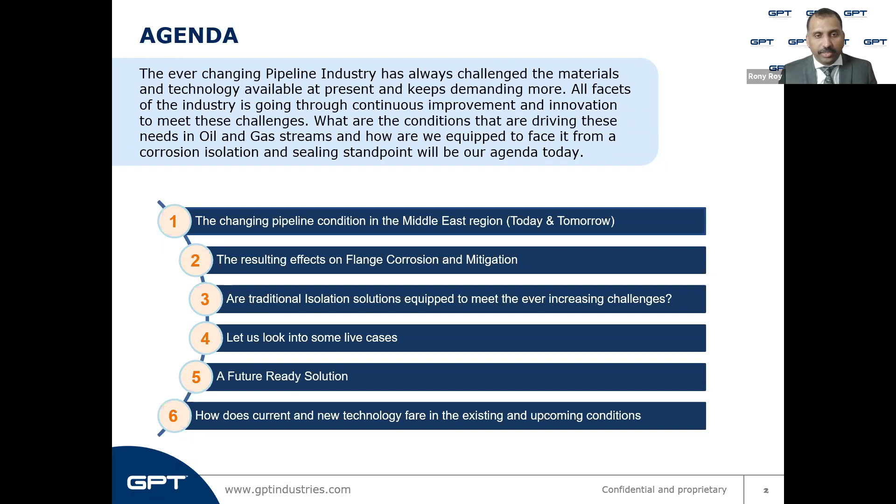Today we are standing at the threshold of a significant energy revolution that is going to change the way we live, travel, conduct business, and manufacture. Yet we know that man's dependence on hydrocarbons is not going away anytime soon. In fact, peak oil is still a couple of decades away, and gas continues to dominate the market as it backs up renewables and provides cleaner energy.

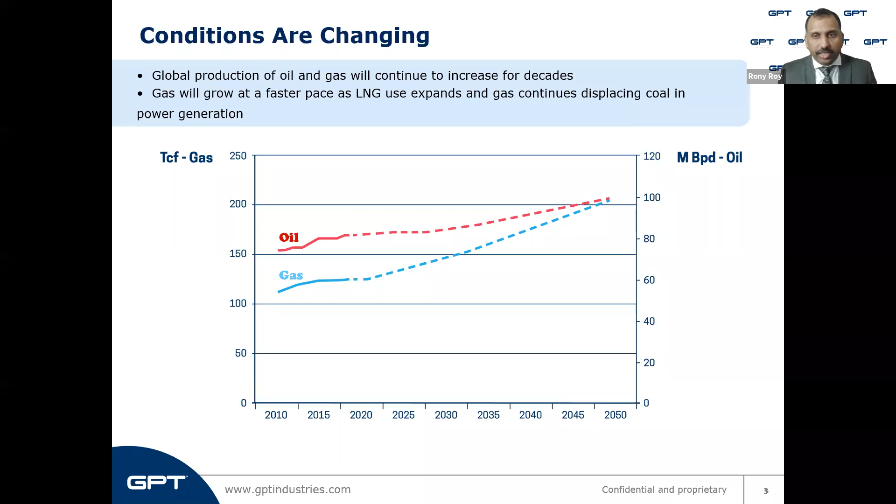Population growth is also driving that demand, and producers are going to have to operate differently to meet it. The easy to extract fields are getting depleted. As an attempt to make the supplies meet the demands, newer techniques and technologies are required.

Now the conditions are changing because the scenario is becoming more and more demanding for the oil and gas or hydrocarbon industry to rejuvenate old wells and to go deeper than ever before to obtain the oil and gas.

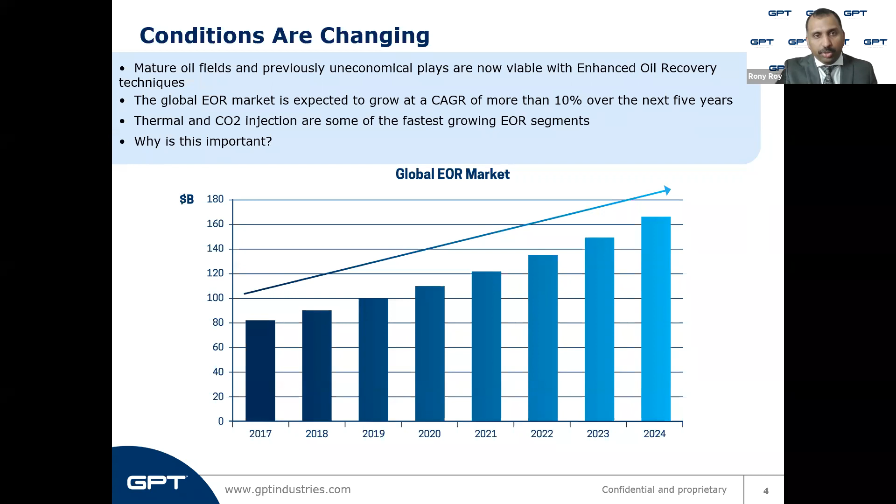Enhanced oil recovery methods have to be put in place now using steam, nitrogen, natural gas, carbon dioxide, thermal injection, and these are all on the rise and will continue for the next couple of decades. This exposes products in the pipeline to temperatures and pressures and mediums that it has never seen before, and that too in large quantities. High pressure and high temperature wells, and ultra high pressure and high temperature requirements, are on the rise. Suitable materials that can withstand very high temperatures and very high pressures are required to be employed for each and every component in a pipeline.

Further, the conditions are changing in terms of the sour content in the wells. As mentioned earlier, the easily recoverable and sweeter resource wells are getting depleted quickly. The newer enhanced recovery methods and knowledge in exotic metallurgy has helped to drill deeper and extract from wells with more sour content. H2S from these sour wells, hydrogen sulfide, affects detrimentally all the components used in these operations. In pipelines, hydrogen sulfide is a primary contributor to a substance called iron sulfide, which you see as black sedimentary buildup inside the pipelines when you open it up after certain years for maintenance. And this buildup is intrusive in nature, and it disturbs the flow of media and even facilitates corrosion.

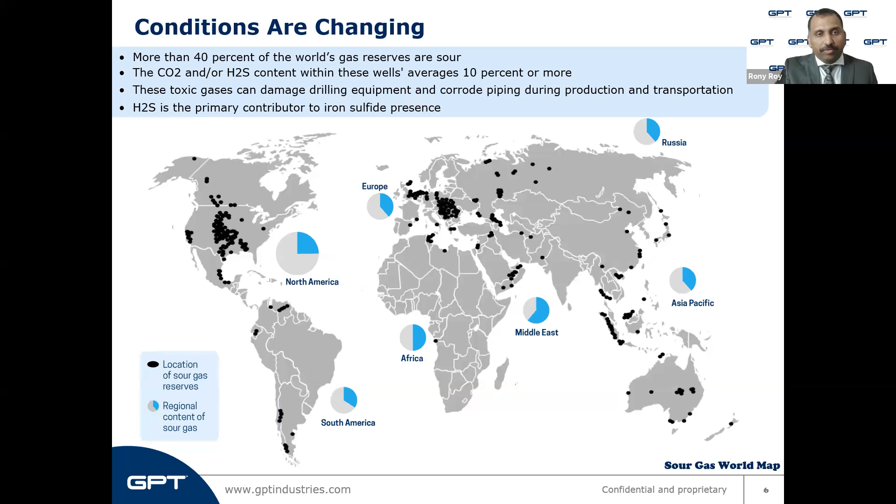Even greenhouse effect reduction requirements are in place, with government entities taking a much more proactive role to bring the emissions down. Talking about onshore, offshore refineries, distribution lines, and in the upstream, midstream, and downstream processes of the hydrocarbon industry, every sector is aiming to reduce the carbon footprint and the emissions.

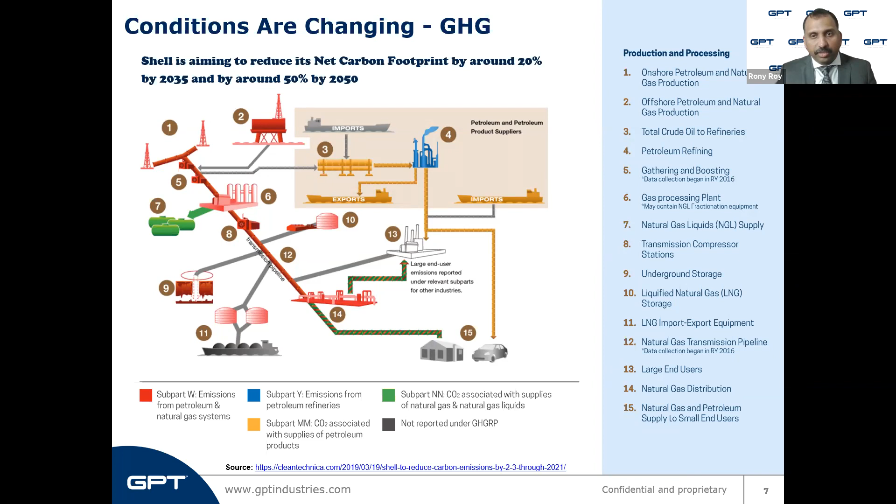Shell is aiming to reduce its carbon footprint by 20% by 2035. That's like 15 years down the lane, where everyone is concerned about reducing the emissions. Even here in the Middle East, local players and end users are adopting serious measures to reduce their carbon footprint and be less taxing on the environment, which is good news for everyone, and manufacturers like us are also required to be aligned with it for a joint effort toward a good cause.

ADNOC recently mentioned that it aims to reduce its carbon footprint by 10% by 2023 and 25% by 2030. To achieve this, ADNOC is constructing new carbon capture, utilization, and storage facilities alongside the existing Al Reyadah one. Saudi Arabia's state oil giant, Saudi Aramco, has agreed to reduce the carbon intensity of its business as part of the Oil and Gas Climate Initiative, which includes Shell, BP, and ExxonMobil as an industry-funded alliance. They have pledged to reduce the carbon intensity of their fossil fuel production to between 20 and 21 kilograms of carbon dioxide per barrel of crude by 2025.

To meet these stringent emission norms and targets, the sealing needs to be tighter, with little to no chance for permeation.

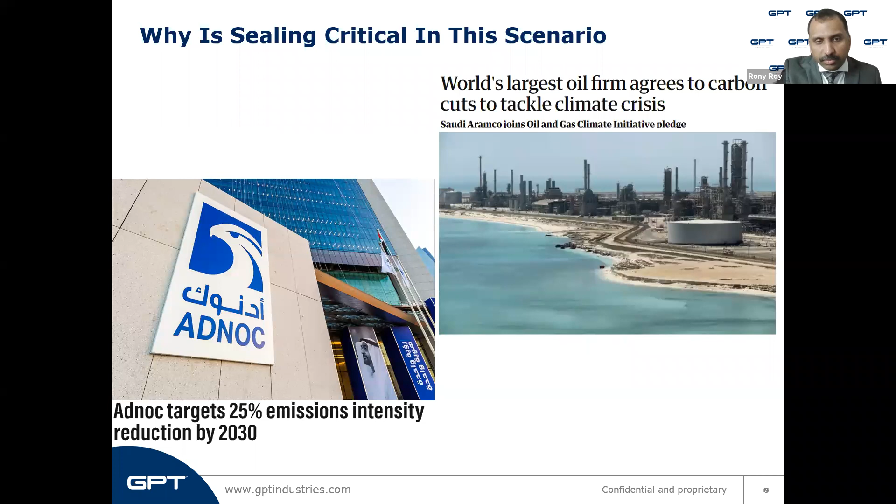So how do these conditions influence sealing? Such changing conditions require a significant improvement in flange joint sealing, and it is the need of the hour, as only a correct seal or gasket can allow the stuff that should remain within the pipeline to stay within the system. The ideal seal should be able to remove the chances of contaminating the surrounding environment with a tighter seal. The material itself being more compliant to the conditions will help in reducing toxic emissions and better performance.

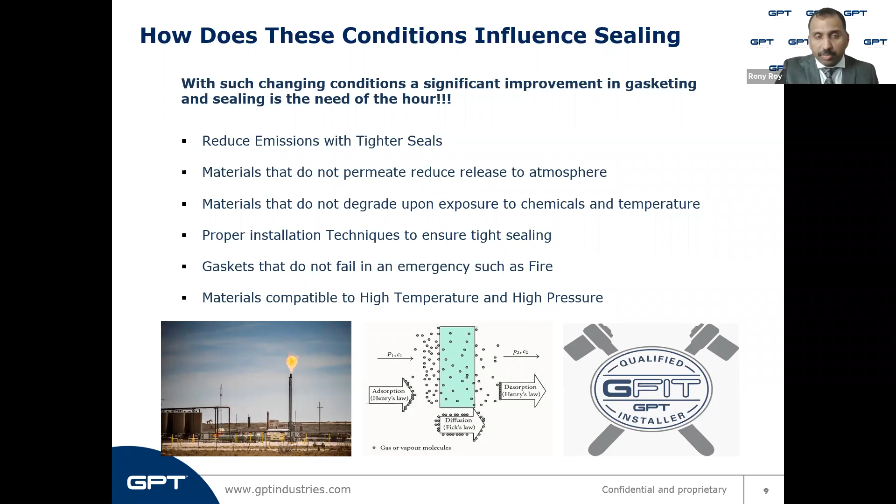A proactive method of prevention of seal failure by increasing the skills of personnel through training and doing the installation correctly in the first place is also required. Better and safer seal design to eliminate risk during emergencies such as fire. All these factors are contributing to the requirement of bringing down the emissions and making the seals more effective in the future.

With all this insight in developing the ultimate seal for the future, we will see how seals in different conditions, such as environmental and metallurgical factors, can affect the flanges where they need to seal. Flange face corrosion is a subject in its own right, as many companies have invested millions of dollars to ensure the flange joint conditions perform well to meet production consistency and quality.

Corrosion preventive measures such as regular maintenance, using flange isolation kits, and using flange joint covering bands are some of the methods adopted for achieving protection against corrosion in flange joints. Today we'll look into how flange isolation kits contribute to this requirement.

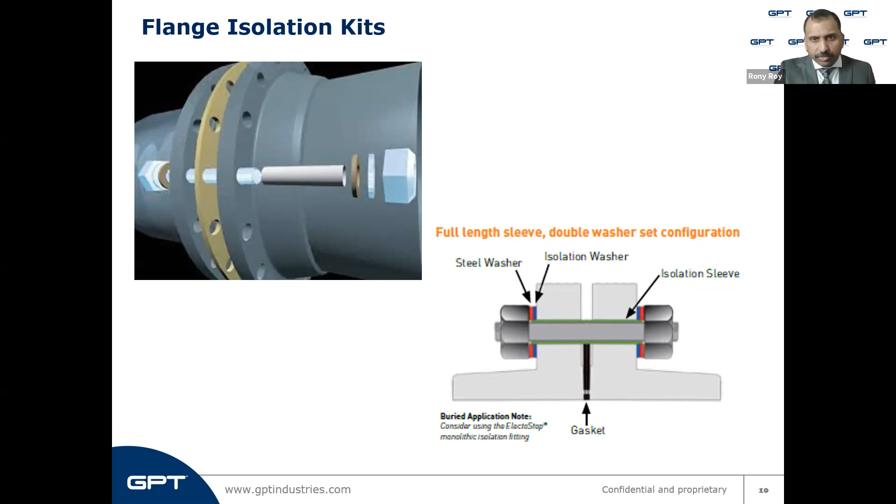Flange isolation kits remove the metal contact between such flanges at the flange faces with an isolation gasket, at the studs with an isolating sleeve, and at the nuts with isolating washers, as you saw in the previous slide. By isolating the metal-to-metal contact, flange isolation kits eliminate any chance of galvanic corrosion, thereby preventing flange reduction or material reduction in the flange joints.

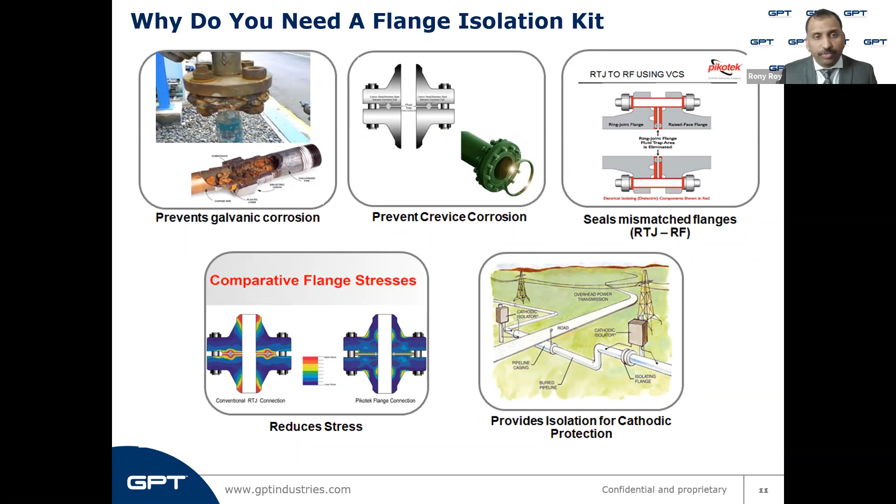And the final one is isolation joints being used in CP systems, or cathodic protection systems. This enables isolation between sections that are CP protected and unprotected. It also helps to increase the cathodic protection efficiency by eliminating the risk of stray currents and surrounding electrical influence. Also, it is used in long pipelines at sections of above-ground and underground transfer points.

So we have seen what a flange isolation gasket kit does. Now, where do we stand in terms of this industry? Let us see where the current technology stands and why innovation is long overdue in this field.

In the beginning of the last century, phenolics was the material of choice, which was then taken over by fiberglass or glass reinforced epoxy that came into the scenario through development in material science in 1942.

Over the years, since its introduction in the isolation industry, gaskets made from glass reinforced epoxy have seen various improvements and incremental development to compensate for its shortcomings and the heavier demands of the hydrocarbon industry.

Various improvements in the design of the isolation gasket made by GRE were ushered in to make it withstand high pressure, provide fire safety, and make it more chemically compatible.

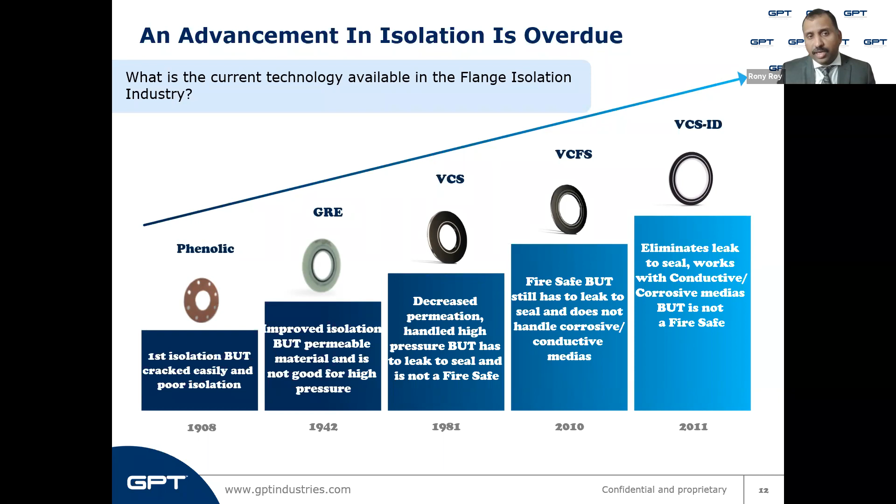Yet we see a common theme here. The glass reinforced epoxy has its own demerits, and gaskets laminated with them have isolated flanges but have struggled to keep up in other areas. Permeation, susceptibility to melting in a fire, chemical incompatibility - all these issues have plagued the plastic laminate, or the glass reinforced epoxy laminate, that goes on top of isolation gaskets.

Now, what is the challenge with the current technology? We have seen designs where the isolation gasket is made from a stainless steel or a metal core, which is laminated by GRE, or glass reinforced epoxy, on both sides of the gasket.

As a global manufacturer, GPT always interacts with corrosion engineers, integrity engineers, reliability engineers, and material engineers at our end user companies throughout the world. And we perform voice of the customer interviews regularly. In such discussions, we come to know the trending changes and new needs of the industry, and design our products accordingly.

During such interaction, one of the engineers of an esteemed customer once quoted, "I really like this gasket that you have invented, but this has a leak to seal design."

And it has got a groove where a Teflon seal gasket, which is pressure energized or spring energized, is laid in. Now, when pressure is introduced into the media in the line, the media can permeate through the GRE material, the glass reinforced epoxy material, and can reach the Teflon seals.

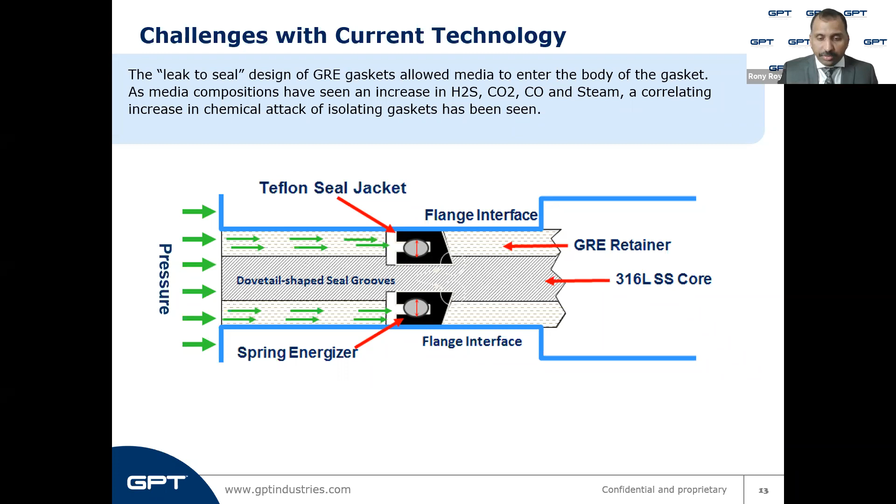Now, talking about GRE permeation, these are some lab images that we had created over the years to show how a GRE fails. GRE fibers act like straws, and they can give a straight or very continuous path for media to flow through them.

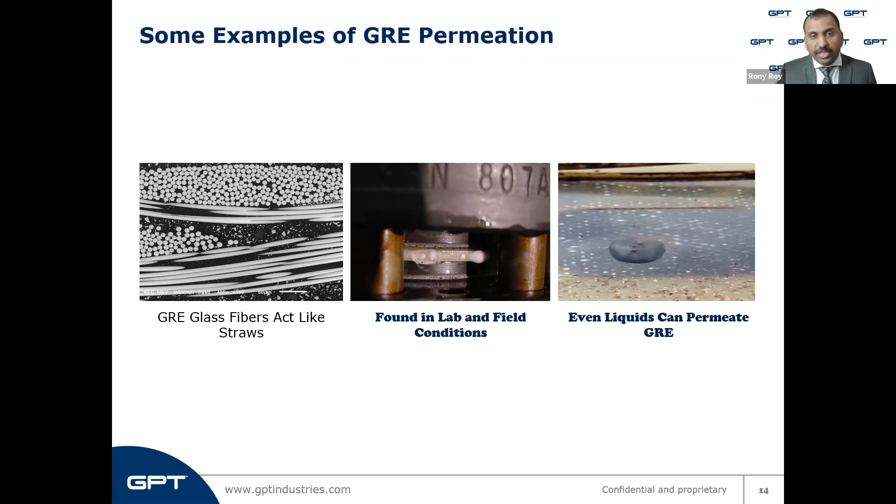And you can see another picture on the right hand side. It is a gasket that was taken out of operation after 15 years in a highly viscous hydrocarbon line, and yet you can see the hydrocarbon or the media had permeated through the GRE body itself.

Now, moving on to live cases that has led us to think about these kinds of failures, one of them is here, where the size was a 12-inch, 1500 class flange connection.

N-butane was the most prevalent chemical in the pipeline makeup. The thermoset glass reinforced epoxy receives a not rated certificate for this chemical at 234°F. Greater than 20% swelling will occur with a greater than 50% loss in tensile strength. This confirms why the G11 delaminated.

G11 is a type of GRE grade used for manufacturing these gaskets. You can see the glass reinforced epoxy G11 had delaminated from the stainless steel core, which led to the blowout of this gasket.

A chemical treatment was also added to the media stream on occasions, and this treatment contained ethyl benzene, which has a non-rated rating at 70°F with the epoxy. Upon evaluation, we could see that much of the gasket was simply glass fiber with no epoxy left in the matrix.

This happened as the media in the line started to migrate and permeate through the gasket material made of GRE. Once the epoxy was gone, the gasket lost its strength, and the 1636 psi line pressure pushed the seal into the weakened glass structure and created a blowout.

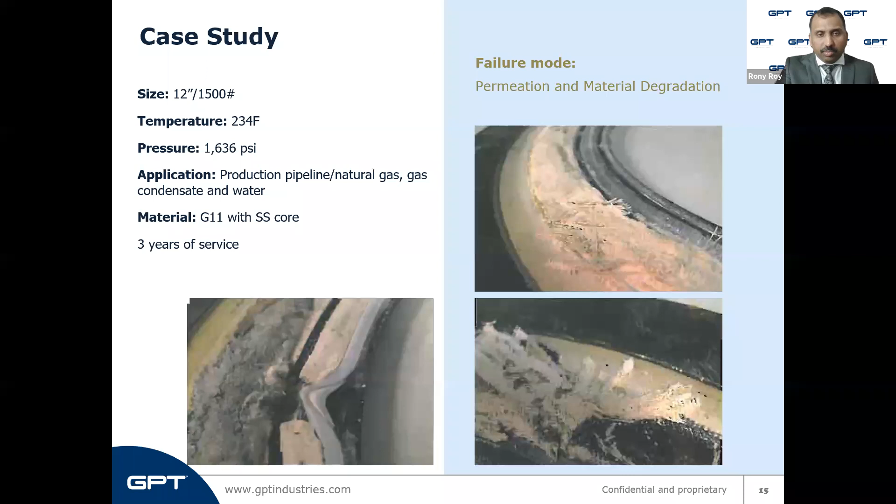Another scenario with changing conditions in modern times is the high pressure and high temperature requirements. Conditions are demanded for higher steam applications, and temperature has increased a lot over the years. The temperature requirements for well conditions are much higher than they were in the past.

GRE does not have the high temperature capability, and homogeneous GRE does not have high pressure capability. Metal coated GRE should not be used in applications over API 10K, and fire safe glass reinforced epoxy, or GRE, should not be used in applications over API 5K.

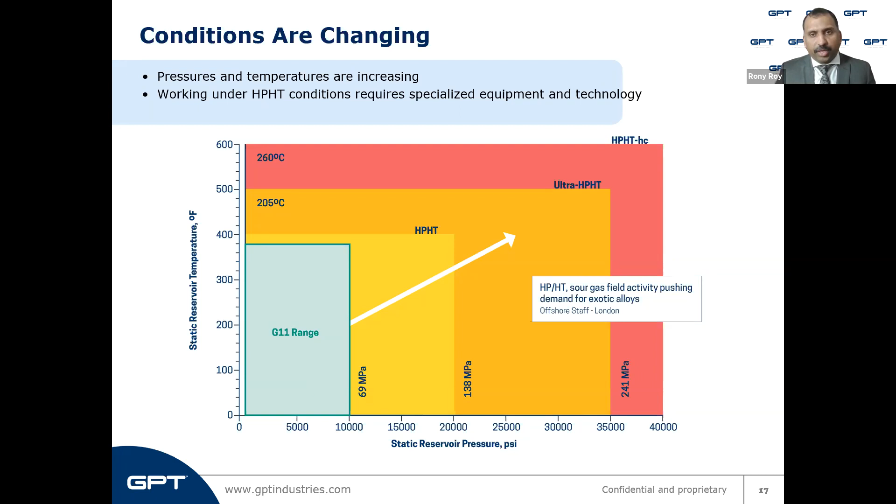As we just saw, G10 covers very little of the potential temperatures and pressures that can be seen in today's pipelines. G11, another grade of GRE, has a better temperature rating with a limit of 200°C, but it still covers only a small portion of this graph.

Moving on, we can see a case study of how GRE gaskets fail in high temperatures. This is a live example to emphasize the risk of plastics being exposed to temperatures they will not be comfortable with.

This was a gas application at a Christmas tree, at high pressures of 7,000 psi and over 330 degrees Fahrenheit. The gaskets were G10 with a stainless steel core. These gaskets were exposed to temperatures exceeding the rated value of the G10 material.

The G10 glass reinforced epoxy near the bore on both sides of the gasket was very dry and brittle, consistent with the epoxy binder being driven out of the glass fabric by the high pressure. This leaves the G10 very weak and brittle and can allow the seals to creep, especially at these temperatures and pressures.

The drying of the glass mesh, the absence of epoxy, became much less severe away from the bore. That tells us the inner portions of the gasket experienced higher temperatures than the outer portions. The upper limit of G10 is 302 degrees Fahrenheit or 150 degrees Celsius, so this was not the correct choice for this application, eventually leading to a blowout.

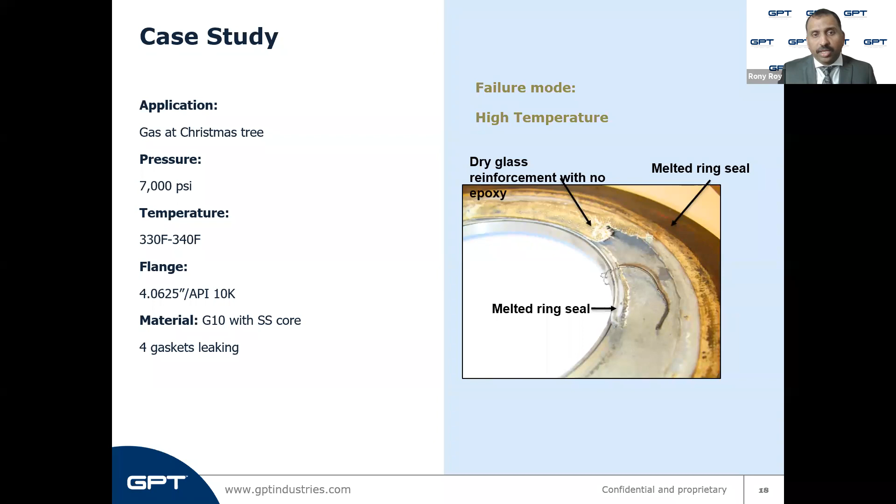Another application where GRE has a shortcoming is steam. This was an actual gasket put into service, which was taken out of service after 34 weeks. This speaks volumes about the incompatibility of GRE in steam applications.

Water combined with CO2 will produce carbonic acid, and the epoxy in the GRE is incompatible with carbonic acid. But the carbonic acid wasn't the issue — GRE is simply not compatible with steam.

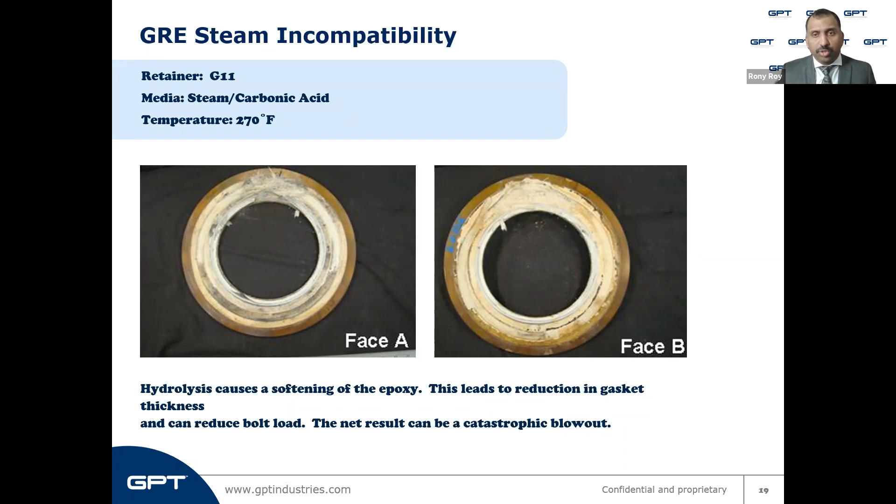This can be seen from the two images. G11 is rated at 200 degrees Celsius, so 270 degrees Fahrenheit should not have been a factor, but the softening of the gasket due to steam introduction and the resulting volume loss led to a blowout, which is a real danger.

A case study to prove this point is here. At GPT, we are lucky because we have a fairly large engineering staff who are able to review these failed isolation products and create a forensic report about it.

We are also fortunate that we are part of the Garlock family of companies, and Garlock has a tremendous amount of analytics equipment in multiple laboratories. We are able to ascertain material component makeups, thermal degradation values, maximum temperature exposure, chemical attack, tensile values, change in tensile values, and many other things we can evaluate in our laboratories.

We even have a functional test laboratory that can replicate field conditions to make sure our gaskets and seals are going to work in the conditions that are out there. In this case, we have a 16-inch 600 class glass reinforced epoxy metal coat isolation gasket, like the VCS we discussed before.

The pressure was approximately 1440 psi and the temperature was 220 degrees Fahrenheit or 105 degrees Celsius. The media was hydrocarbons with steam, and the application was a slug catcher. Analysis shows that the epoxy in the glass reinforced epoxy became hydrolyzed by the steam.

Hydrolysis, as known in the Greek term, hydro means water and lysis means to unbind. The epoxy chains were broken down under pressure and it literally got driven out of the glass matrix. This dramatically reduced the strength of the product and ultimately led to leakage or blowout.

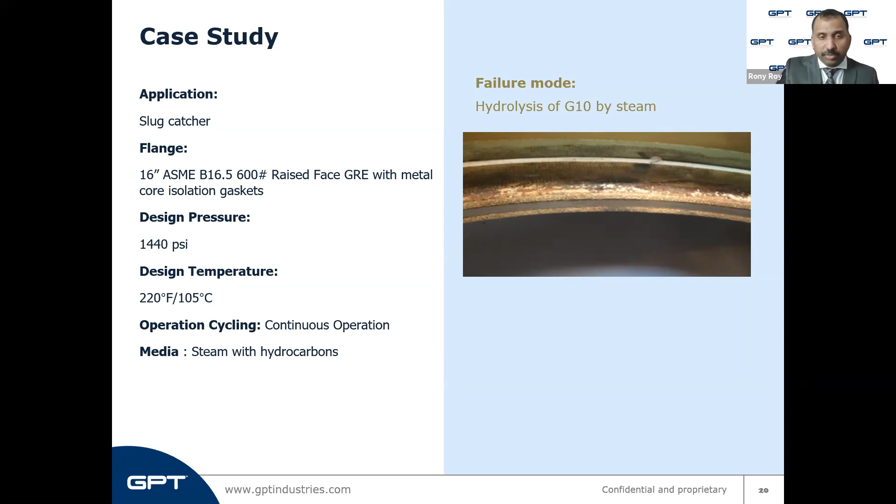Another shortcoming of GRE is its chemical incompatibility when it comes in combination with sour content. If the media entering the gasket is not compatible with the GRE laminates, there can be lots of types of failure. This is a study of glass reinforced epoxy's incompatibility to the chemicals in the media flowing through the pipeline, which can lead to chemical attack.

In this case, G10 and G11 grade gaskets were exposed to sweet gas and sour gas for a period of 2 weeks. You can see from the bubbles forming on the gasket face that it appeared as though the G10 and G11 were being attacked by the sour gas.

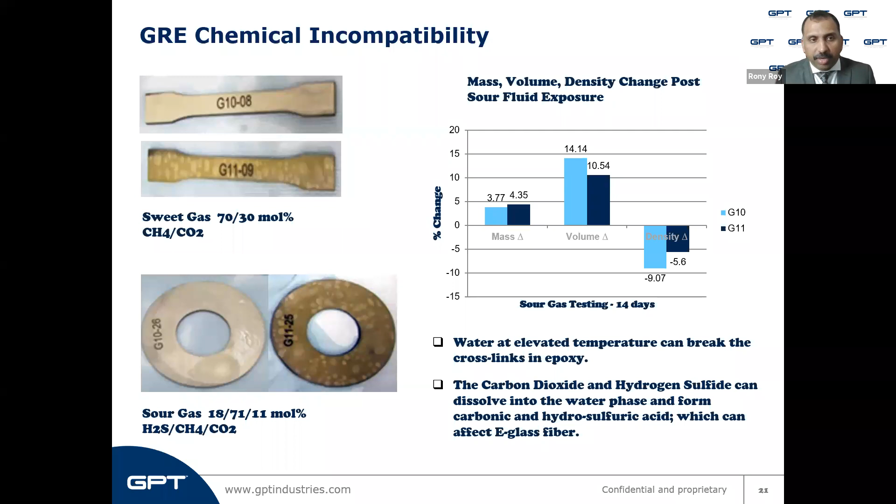We performed mass change, volume change, and density tests on the G10 and G11 samples, and indeed they were both attacked and had significant changes in these three parameters by the sour gas that was introduced into the media while testing.

This is a live case of how GRE will fail under conditions of chemical incompatibility in sour media. The temperature was 124 degrees Celsius, the pressure was 1180 psi, and it was a ring type joint flange. The gaskets in this were only in service for 90 days.

To really get a good understanding of exactly what happened to this gasket, let's have a look at a cutaway view of the gasket in the pictures at the bottom. The cause of failure was a combination of attack by sour gas and the effects of steam hydrolysis.

You can see from the images that the inside of the gasket was devoid of epoxy, extending all the way through approximately 66% of the gasket. The high temperature water broke down the epoxy by breaking the crosslinks, and the hydrogen sulfide, as we know from other sour gas testing, accelerated the breakdown in the epoxy by reducing the gasket's density and increasing the gasket's mass.

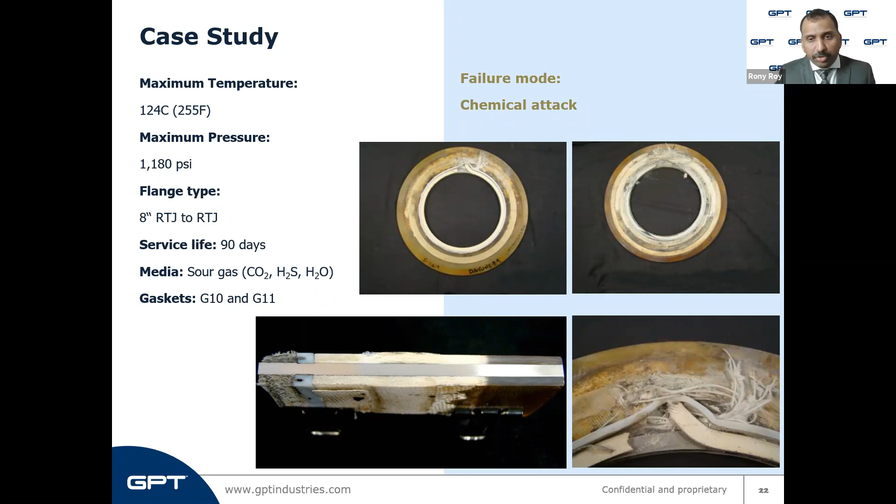Additionally, the hydrogen sulfide can dissolve into the water, and the carbon dioxide can as well, creating hydrosulfuric acid and carbonic acid, which can break down the glass fibers. So this domino effect led to a failure in just 3 months.

We have equipment to conduct road shows, and we have done some of these road shows in our customers' facilities at Abu Dhabi, Saudi Arabia, and India, in our quest to increase awareness about the lack of fire safety and the issues that the lines will face if they lack fire safety in the GRE non-fire safe isolation gaskets.

Fire tests such as API 6FB, live roadshows, and history all prove this point. Now, which customer wouldn't want a fire safe product to increase their safety rating and records? Yet most of our sales testify that customers still buy non-fire safe GRE gaskets, as the fire safe gaskets are very expensive for many.

G11 would fail after 200 degrees Celsius, G10 would fail after 150 degrees Celsius, and so it leads to a fluid leak path. The other failure components are the isolation sleeve, which is also made from G10 or G11, and the isolation washers, which is also made from G10 or G11.

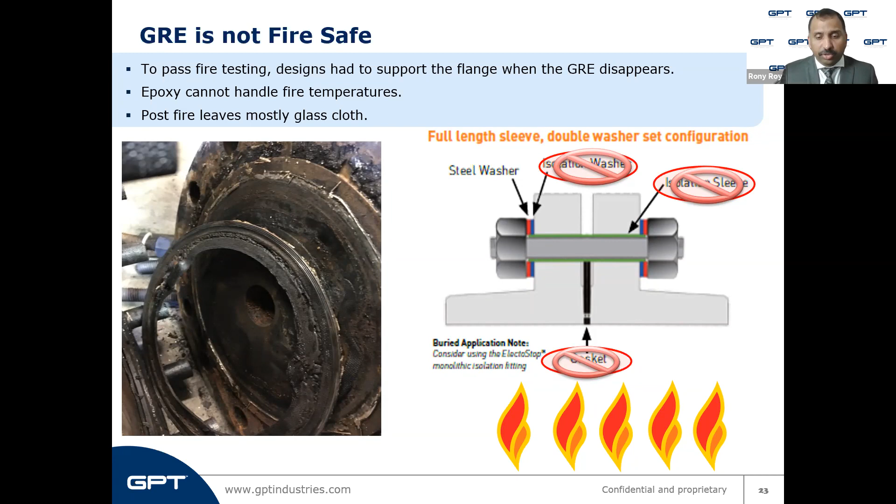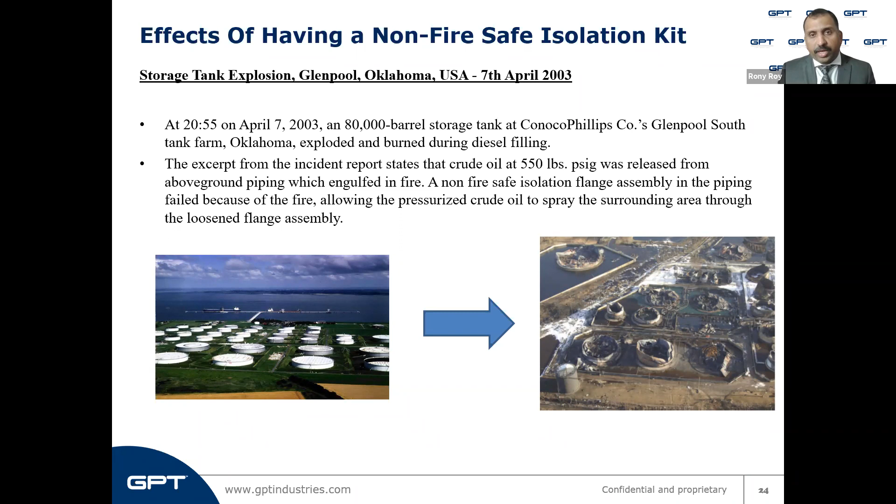One example is the storage tank explosion in Glenpool, Oklahoma, USA. The incident report stated that crude oil at 550 psi was released from above ground piping engulfed in fire. A non-fire-safe isolation flange assembly failed because of the fire, allowing pressurized crude oil to spray the surrounding area through the loosened flange assembly. This shows how things can severely go wrong and cost millions of dollars, far more than the slight premium needed for a fire-safe isolation gasket.

Another big challenge with GRE laminated isolation gaskets is their thickness. The metal-core GRE isolation gaskets, due to limitations of available technology, were made thicker than conventional gaskets. A metal-core isolation gasket is 6.6 mm thick compared to 3.25 mm for a regular gasket. This requires a different installation approach, and the flanges need to be spread much more than usual.

We are sometimes told that the gasket was damaged during installation even though installation was done exactly as the manufacturer recommended. When we ask to have the gaskets returned, we often see large indentations in the metal caused by installers beating the gasket into the flange. That is not a manufacturer recommendation.

So the common 6.6 mm thick isolation gaskets are difficult to install in pipelines designed for gaskets that are 3.25 mm thick. Flanges that are not perfectly parallel and not well aligned present an even greater issue.

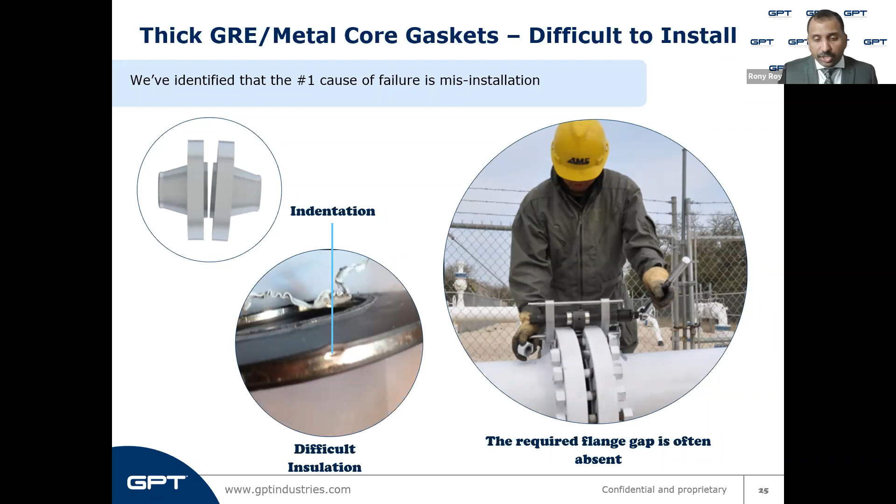A case study shows how this can go wrong. This is a live example of bad installation. Three isolation gaskets were installed on the upstream side of a venturi meter. Not enough flange gap was created, and the isolation gaskets were damaged during installation.

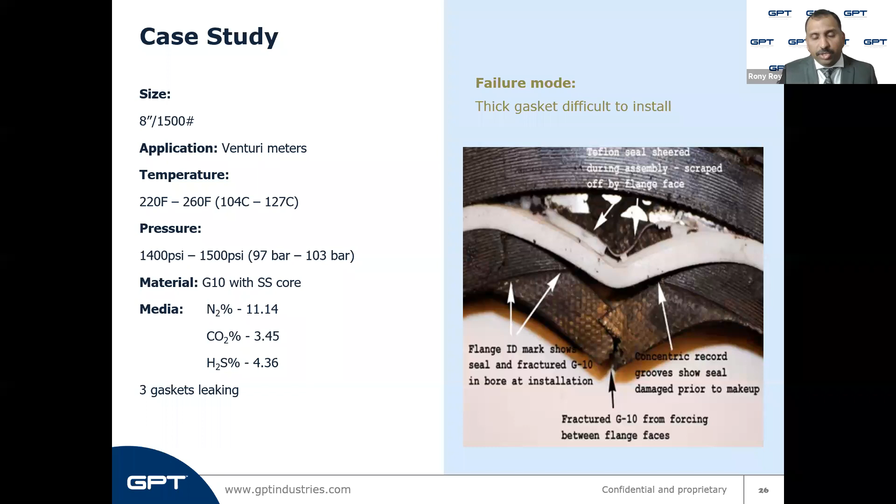Interestingly, in this case the downstream gaskets appear to have been installed first, and all three functioned properly. But when the upstream gaskets were installed, the space was very tight and limited, which led to tearing of the GRE as well as popping out of the PTFE's additional seals.

Now, what could be the ideal isolation product? We sent out invitations to corrosion engineers, integrity engineers, reliability engineers, and materials engineers at companies and users around the world and performed a voice of the customer study. Based on the feedback we received, we zeroed in on 5 essential points: fire safety at an economical price point, better chemical and thermal properties, a thinner gasket for easy installation, high pressure capability, and low emissions.

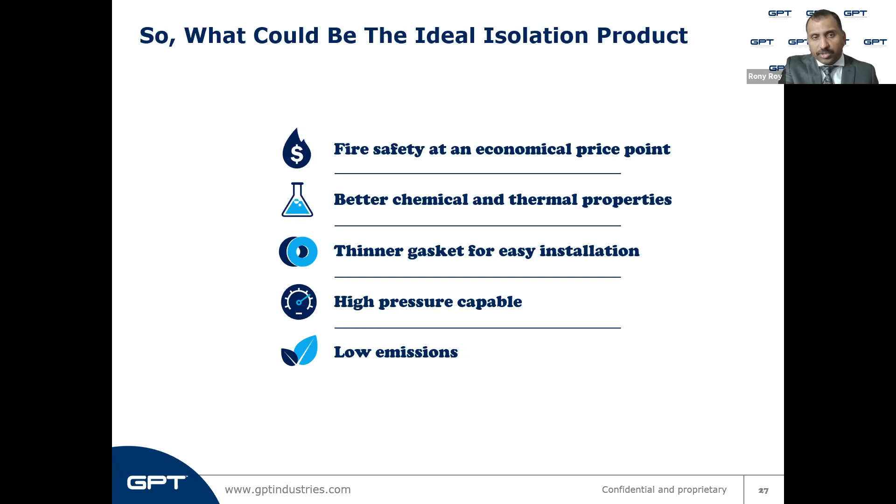These were the 5 points we kept in mind when developing a gasket that is future ready. This is the new product GPT introduced into the market about a year and a half ago, called the Evolution.

For the last 80 years, isolation gaskets have been a plastic laminate of some sort. As we've just seen, there are many potential failure modes with these plastic products. GPT has spent over 5 years researching the failure modes of GRE products and now proudly introduces this first isolation gasket that has eliminated any plastic or non-metal on the retainer of an isolation gasket.

This is a 316 SS core gasket with a gasket retainer that has a highly chemically resistant, durable, scratch resistant isolating coating. The ID is sealed by a Gylon 3500, a restructured PTFE seal that is also highly chemically resistant. The ID seal is backed up by a secondary seal, as seen in the cross-sectional view, with a 718 internal C-ring that is also coated with a very chemically resistant coating.

All coating surfaces are extremely impact and abrasion resistant. We have subjected them to severe testing and scratch testing to make sure they are worthy of use in pipelines and in the industry.

The plastic handle also makes installation and removal easier. It's a slight deviation from regular gasket designs, which makes installing and aligning the gasket inside the flanges very easy. This innovative new solution is also 3.175 mm thick, in line with general industry requirements for gasket thickness, and it is API 6FB fire tested in multiple sizes and classes to ensure it is fire resistant.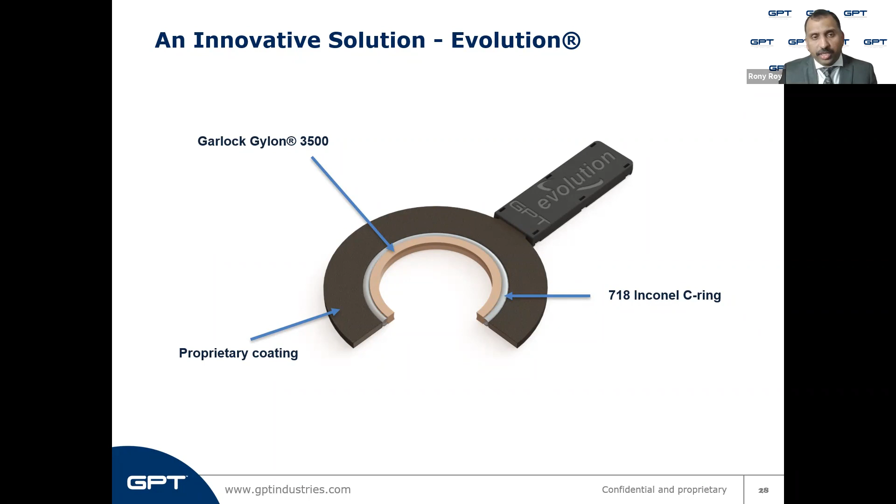Moving on, I was talking about having a tight sealing, making the new sealing options more compliant and better performing for emission requirements, bringing down the leakage rate. This new innovative design has several key attributes, one of which is that it is extremely tight sealing.

If we look at the sealability of Evolution versus a G10 stainless steel isolating gasket of previous technology, in an EN 13555 leakage test, Evolution has a leak rate of about 1 x 10^-8 helium per second - that's about 1 cc of helium leaked over a 3-year period. Whereas the G10 laminated stainless steel isolating gaskets leak about 1 cc of helium every 3 hours. Many conventional gaskets, such as spiral wound ones, perform much lower than the G10 laminated SS isolating gaskets. You can imagine how much tighter Evolution is.

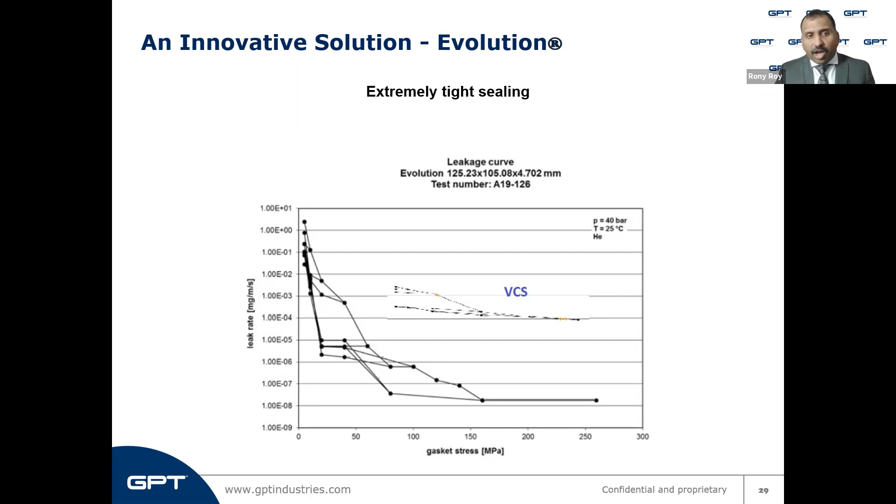The other requirement analyzed during our changing conditions slides was the temperature requirement of the materials. GRE G10 and G11, as we saw, has a temperature rating of 150 degrees Celsius - G10 is 150 degrees Celsius maximum, and G11 is 200 degrees Celsius maximum. Evolution is rated to 500 degrees Fahrenheit, or 260 degrees Celsius, and has shown very little degradation even at higher temperatures. It looks almost like the test was run at ambient temperature when you compare these two graphs against a G10 material - G10 becomes a molten mess by the time it reaches the temperature limits of Evolution.

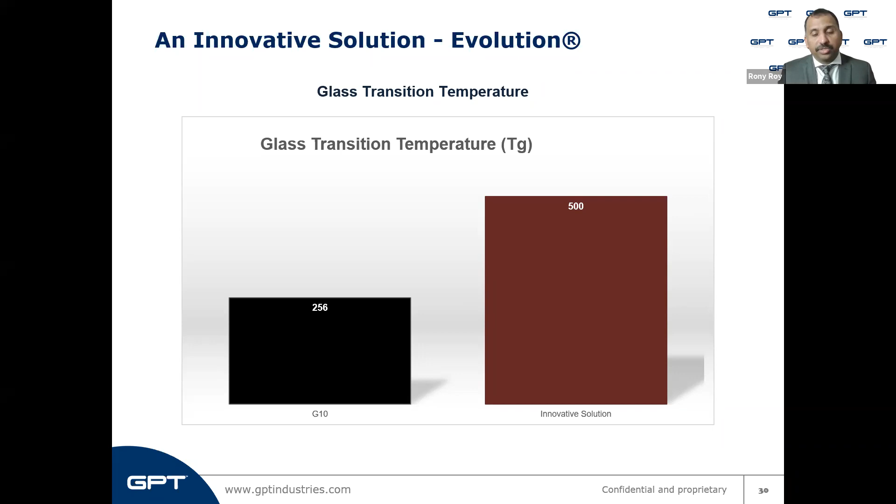You can see G11 and G10 compared to Evolution based on temperature ratings, as well as another important factor, the dielectric factor. Since these are isolation gaskets, dielectric capacity is important as it prevents galvanic corrosion. The dielectric value of Evolution is significantly higher than the homogeneous G10 and G10 with the stainless steel core. The same holds true for G11, which is also similar to G10 in its dielectric values, rated at 800 volts per mil.

Evolution, on the other hand, with its new coating, has a minimum dielectric value according to ASTM D149 dielectric testing requirements of 1400 volts per mil, and that is the minimum rating. It has gone up to 1800 volts per mil in some of our tests.

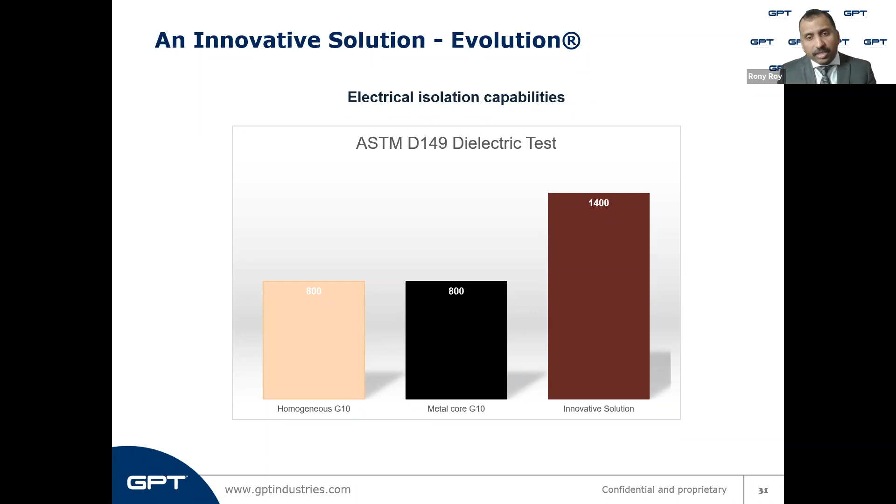The other key factor is that G10 and G11 will absorb moisture during a hydro test because they are permeating in nature, as we've seen in previous slides. This significantly reduces the resistance values after a hydro test. I've seen test results ranging from 3 mega ohms to 7 mega ohms, and many companies specify a limit of 10 mega ohms minimum. This can be a problem when using a G10 or G11 based gasket after a hydro test. Evolution, since it's a complete metal gasket with no plastic laminates, doesn't permeate, and even after a hydro test, the typical dielectric or resistance readings are in the gigaohms range.

Evolution is also much thinner than most high pressure isolating gaskets. The recommended flange gap for a typical flange should be 1.5 times the gasket thickness, which leads to 9 mm spreading of the flanges to install a 6.6 mm metal core gasket.

If you are looking at a regular gasket thickness, that is way too high compared to normal requirements. The Evolution gasket has no plastic retainers on it, so it is much thinner in its construction. It has a 3.125 mm thickness, which is in line with industry regular practices for gasket thickness, so you don't have to spread the flanges much more than what is generally required.

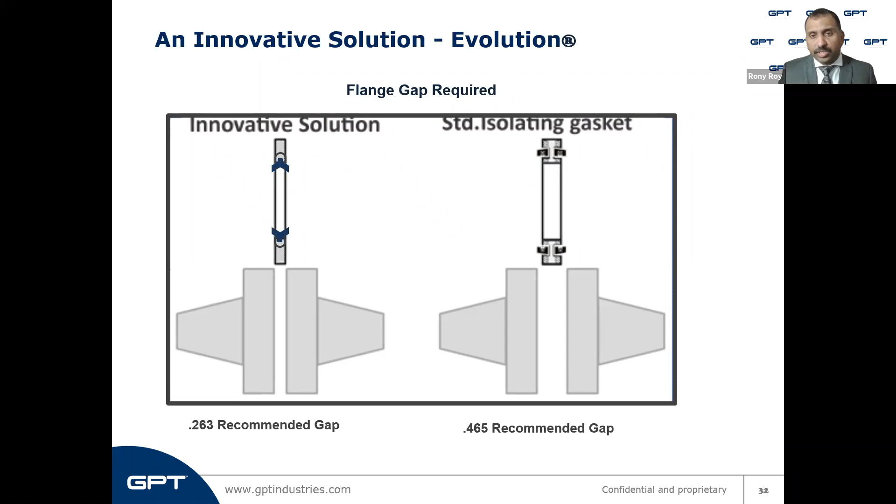We also did sour testing for the new solution along with a new gasket type, along with the G10 and G11 gaskets or materials.

When we immersed it in sour gas media, the mass, volume, and density had changed significantly. This is a strong indicator that the product is being chemically attacked. The bottom line is that epoxy simply is not compatible with hydrogen sulfide. The gaskets were visibly affected by the hydrogen sulfide, indicating further that the gaskets were chemically reduced.

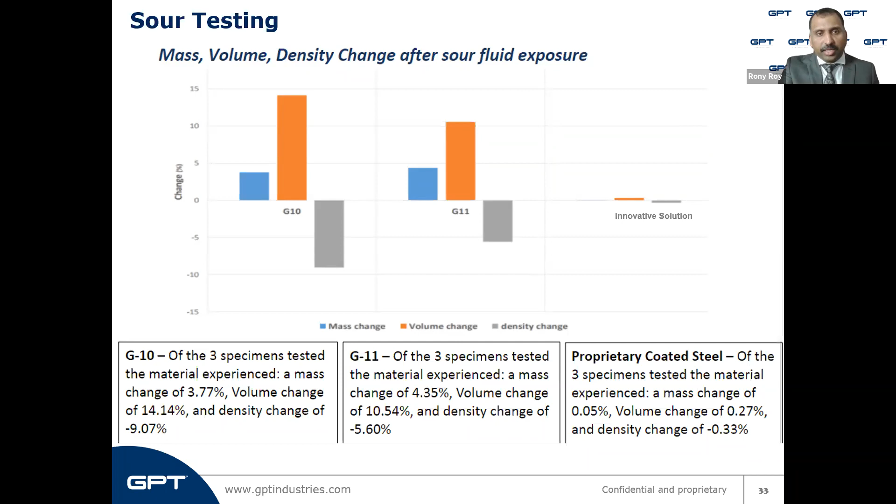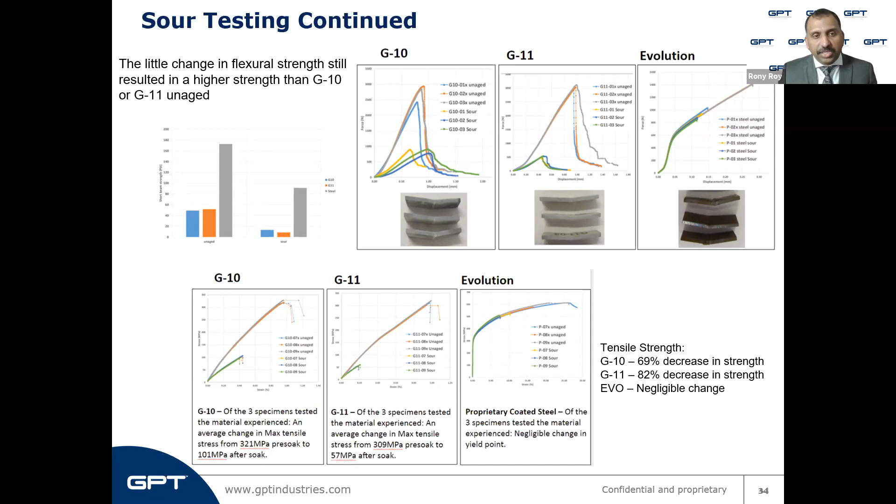You can see that G10 had decreased in strength about 69%, and G11 had decreased in strength about 82%. But if you compare the evolution with it, it had very negligible change. There was nothing much to indicate that evolution would not be able to keep sealing even after the introduction of such media into the line.

Another thing we did to make sure the evolution is chemically resistant to many of the conditions that GRE, or glass reinforced epoxy G10 and G11 laminates, are not, is that we compared the chemical resistance to many other media conditions. As you can see, we introduced saturated steam, hydrazine, N-butane, hydrogen sulfide, carbon dioxide, hydrosulfuric acid, carbonic acid, ethyl benzene.

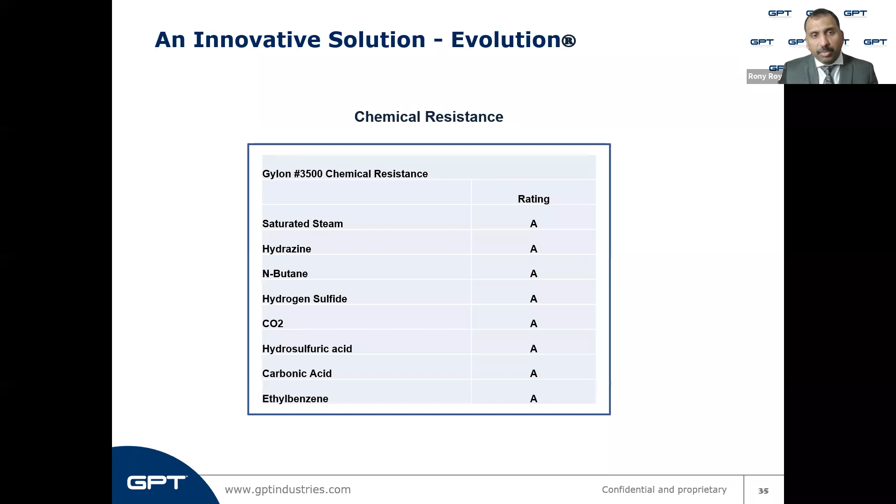And it gets a very good rating, a rating A. That means it is good to be used against these chemicals and will not be chemically attacked. So we made sure that the new solution is chemically compatible where a GRE normally fails.

We have also tested evolution in high pressure tests. In this example, we tested at ambient temperature for 60 minutes of hydro testing. The worst performance we saw was 28,000 psi when we tested 4 samples, and that also was not because the evolution had leaked, but because the flanges were lifting off.

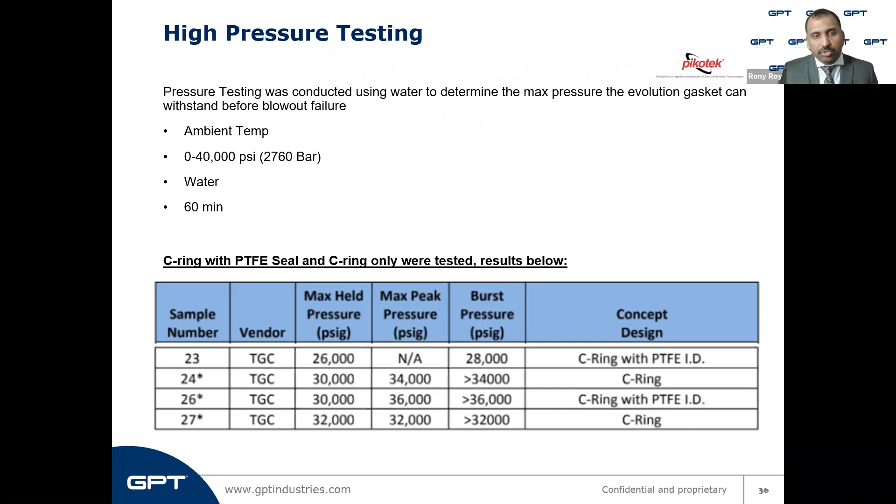Even at 32,000 psi and 36,000 psi, all the leakages occurred when flanges started lifting off at such high pressures. We need to test much higher with higher rated flanges to see what would be the actual pressure conditions that evolution can hold without a blowout. G11 or G10 with a metallic core will leak or blow out between 15,000 to 20,000 psi when subjected to pressure testing.

We have another important thing to talk about, the coating, since people will be unfamiliar with the coated isolation gasket. When we started evaluating coatings for potential use on this isolating gasket, we looked at several tough coatings available in the industry, like the 3M coatings and the PTFE coatings. So many coatings are available out there. The 3M coatings proved to be one of the toughest in the industry.

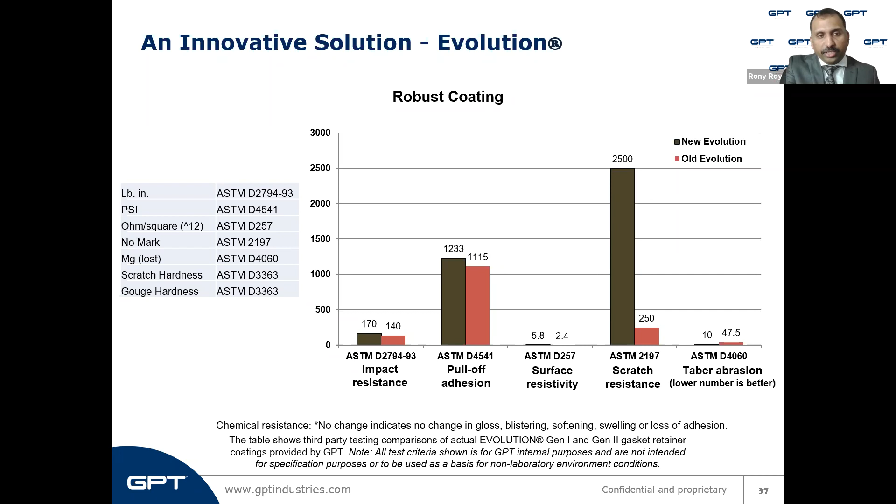So in short, this coating used on this gasket is very, very scratch resistant and highly durable compared to any other coating you've seen available in the market right now.

Now let's recap all the cases we initially saw where the GRE isolation, glass reinforced epoxy isolation products, had failed, from the perspective of as if we had installed evolution in each of those same applications. In the first case, evolution does not allow permeation and will resist hydrolysis, and will survive in that application. Also, evolution is chemically compatible with N-butane and ethyl benzene and would not have been chemically attacked.

In the second case, Evolution has a much higher operating temperature rating than either G10 or G11 and would have worked well in an application requiring exposure to higher temperature.

The third case involving steam: Evolution resists hydrolysis by steam and would have survived that application too. The next case involves exposure to sour gas, and since Evolution is chemically compatible with the levels of sour gas present in this application, it would have performed well even here.

Since Evolution is fire safe and tested to API 6FB 3rd edition fire test requirements, it would prevent a catastrophe or emergency in the event of an external fire by containing the flammable media within the line. In the last case, Evolution is less than half the thickness of most plastic isolation gaskets out there, and would have been much easier to install.

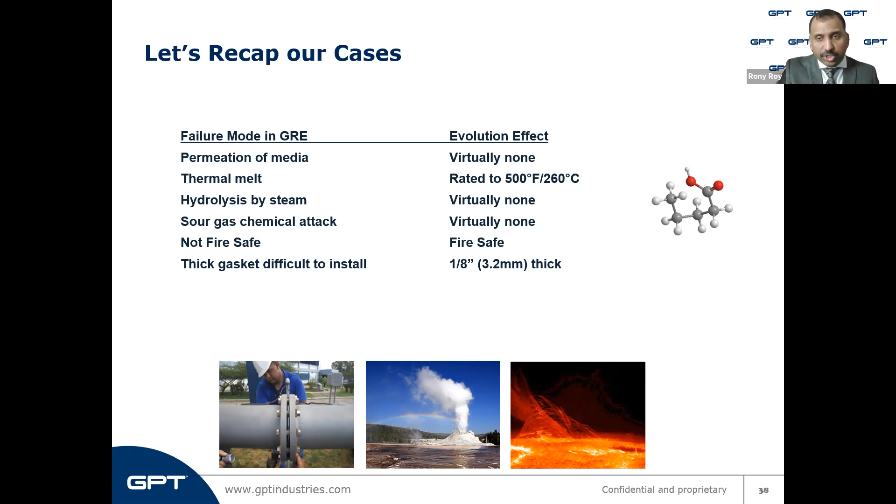Once again, if we revisit the 5 major requirements of an ideal isolation gasket, as put down by the VOCs we had gathered from the industry, we can see that Evolution is specifically designed to meet all these needs. It provides fire safety at an economical price point, has much better chemical and thermal properties compared to a GRE, or glass reinforced epoxy lined gasket, and is thinner to facilitate easier installation, has high pressure capability, and very low emissions.

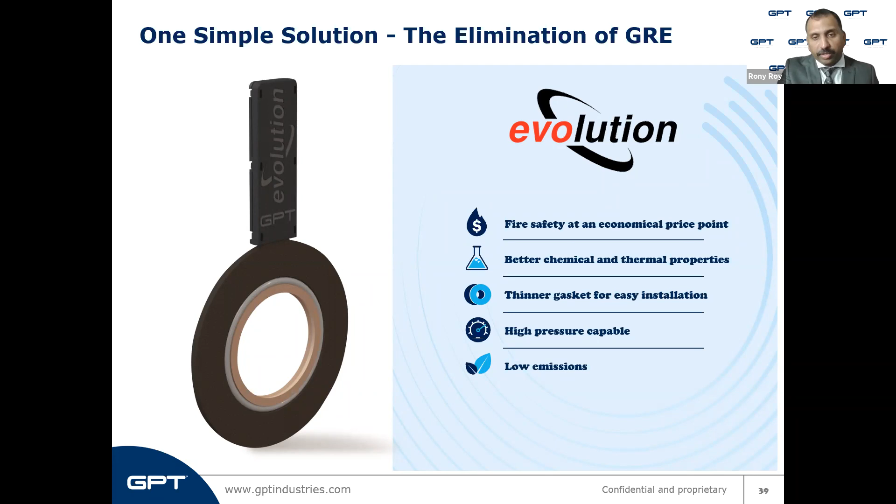This one product eliminates the need for homogeneous GRE gaskets, steel reinforced GRE gaskets, fire safe GRE gaskets, and PTFE ID seal GRE gaskets. It is truly one simple solution available to take care of all the requirements that the industry poses now and in the future. So exactly what are the specs on this new product?

It is a 316L SS stainless steel retainer that has been fully encapsulated in a proprietary coating. It also has a primary sealing element made of Garlock's Gylon 3500, which is a re-engineered, better PTFE design, and has tremendously reduced creep and cold flow characteristics when compared to a regular PTFE.

There is a secondary seal made of Inconel 718, which has great recovery characteristics and is also the seal that will prevent any leakage during a fire. The Inconel seal is also fully encapsulated in this coating. The color of the retainer is dark brown with a tan primary seal.

The coating is approximately 0.010 inch thick, and the gasket is currently rated from minus 50 degrees Celsius as the minimum temperature to 260 degrees Celsius as the maximum. We are doing tests for much lower temperatures to see how this gasket can be used for cryogenic LNG applications.

The sizes available right now are 1/2 inch to 36 inch, although engineering is working on larger size offerings, and we should be able to offer 48 inches before too long. The pressure offerings are 150 class to 2500 class for ANSI class flanges, and API 6A flanges from 2K to 5K, although engineering is working to offer API 10K and 15K applications also.